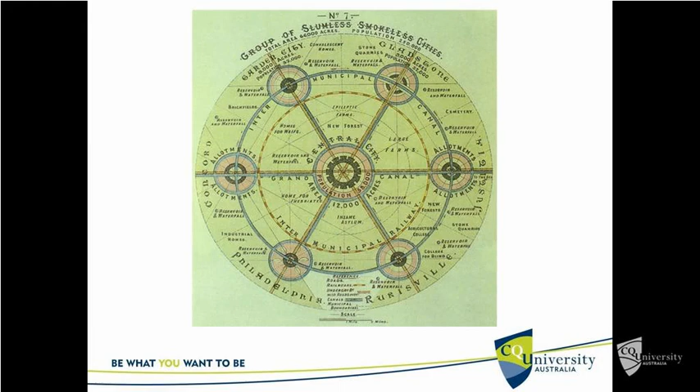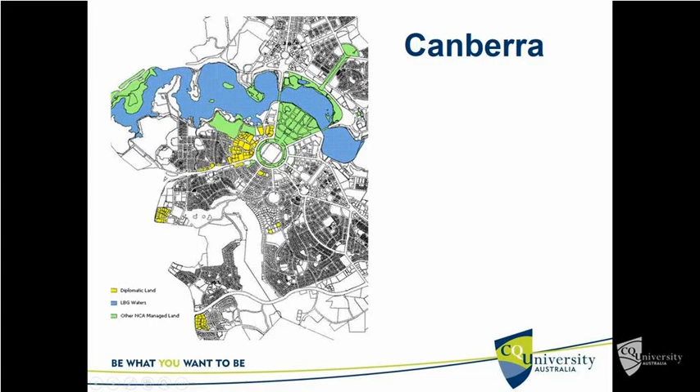So not to linger here. Just to recap, Canberra has a very strong garden city influence in it. You've got the main area in the middle, and you've got some satellites going on here - this is more modern development. So there is an indication of it, planned out in 1912 with planning principles underpinned by the garden city movement. The whole thing behind the planning, and it really should be part of planning nowadays as well, is to make sure people can actually get to work easily, and they've got places for leisure and recreation, and they can get to their hospitals and libraries, make it easy to get around. Unfortunately, modern planning probably doesn't do that very well.

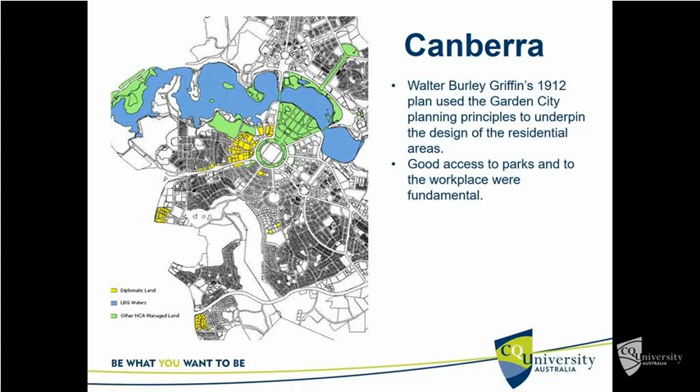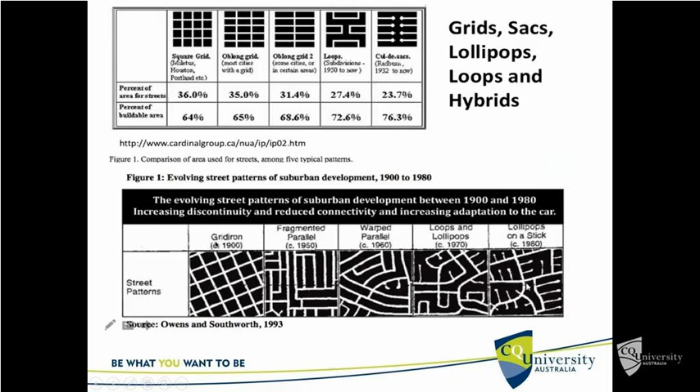And then during the 70s, we start getting little lollipops on the loops. So you've got these bendy roads, and then you stick a little lollipop in and create a cul-de-sac, which means the plot sizes are getting smaller, but you're developing more houses in here. And then what's quite common nowadays, started in about the 80s, is you get the lollipops on the sticks. We've got up here the cul-de-sacs, which has got the greatest developable area, but it does have a slight problem to it.

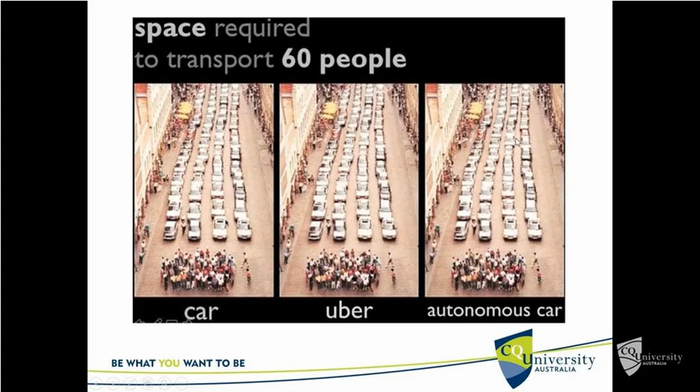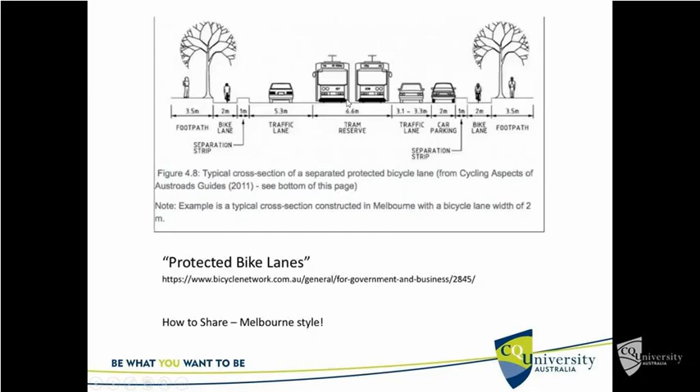And all of a sudden your pedestrians are stranded. Apart from a crossing, and there aren't that many crossings on some of these roads - remember legally you can cross a road not on a crossing if you're more than 20 metres away from one, I think. So if you needed to get across the road, how do you negotiate that? It's not as bad as crossing the road in, say, India, but it's difficult. And these bike lanes are coming in more and more often nowadays. So that's not how you should share your transportation, your roads and your circulation space, really.

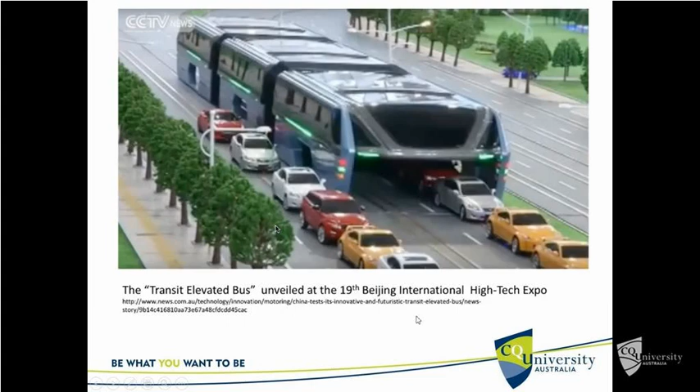If you all remember, I fly up from Brisbane on a Tuesday morning and I fly home again on a Thursday night. So I'm not very good at this.

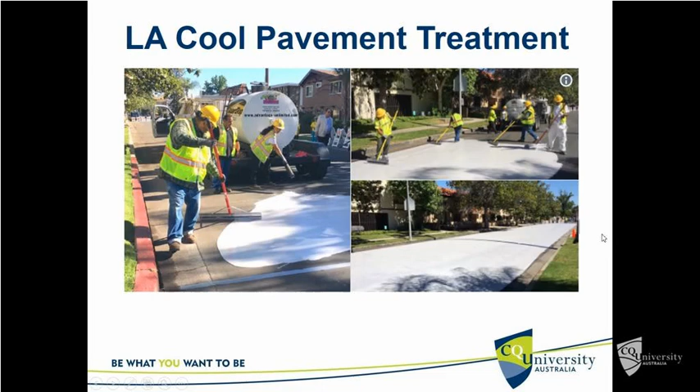It's real simple to use - you just pour it out, spread it, and it dries very quickly. You end up with a beautiful white road which apparently self-cleans when it rains. The advantage is it reflects the radiant heat from the sun, so the actual surface temperature of the road is lower.

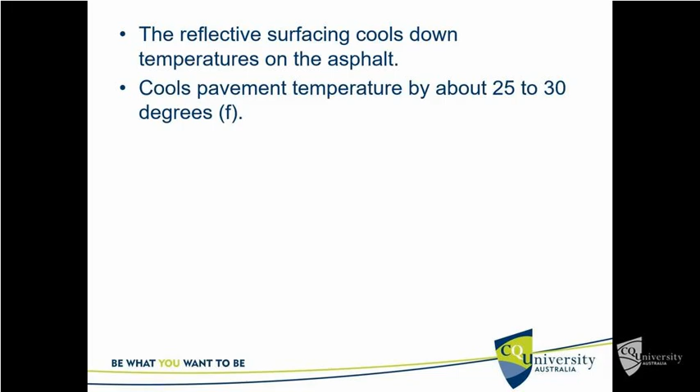The pavement can be 25 to 30 degrees lower - that's Fahrenheit because it's an American article. That's an awful lot. If you've ever tried to walk barefoot on some of this, it's ridiculous. So that's a big reduction.

It reduces the heat island effect - that's basically where built-up areas tend to be hotter than rural areas outside. The buildings trap the heat in, and there are more hard areas in cities that heat up and radiate heat at night. So the heat's absorbed by the roads and pavements during the day, then released slowly at night, which keeps temperatures high overnight.

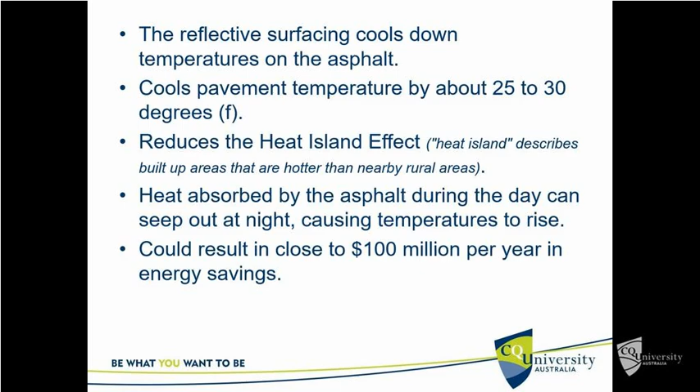So by putting this reflective coating on, reducing temperatures by 25-30 degrees, you're having a big impact later in the day. They've estimated in Los Angeles it's going to save around $100 million a year in electricity savings by people not running their air conditioners all the time. It's a fantastic idea.

That's really what we were going to look at this week. There's a lot of reading for this week which bulks this out quite a lot. But you need to understand the effect of how we lay out a town or city on how it affects people - the fact that we've gone from originally a very easily navigated grid pattern, where you could walk quite easily and have corner shops so you didn't have to go too far, to nowadays where our shops tend to be put in shopping malls on the outskirts of towns or cities.

We're living in cul-de-sacs with very limited public transport. The cul-de-sacs lengthen your commute - you've got to find your way out of your cul-de-sac, and then you've got to go away to a shopping centre. So modern design is completely and utterly reliant on personal transport cars, and we need to start to move away from this nowadays.

I saw a programme last night on the telly about artificial intelligence, and it was arguing that in 20 years we probably won't even be given driving licenses as humans, and all the cars will be completely automatic. Is that going to solve the problem of living in cul-de-sacs? I don't think it is.